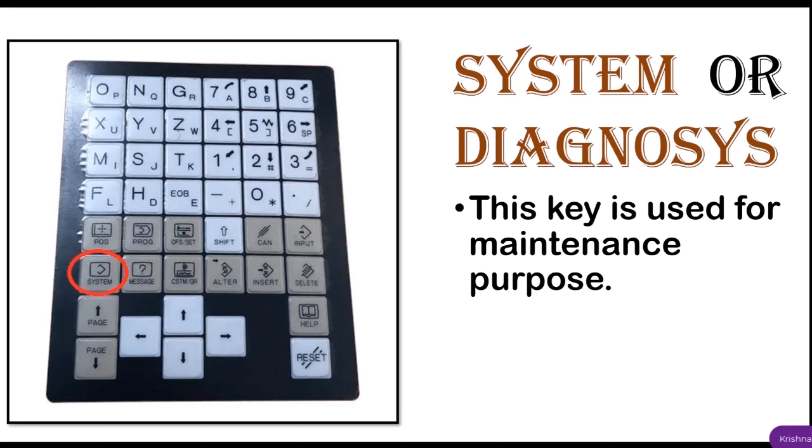Our next key is the custom graph key. Here, you can see the running program graphically. There's nothing particularly special about it. You can simply see how the tool is working graphically. If you want to view it, just press this key when your CNC is performing any operation.

Our next key is the message key. With the help of this key, we can see messages. If you make any mistake, the CNC will notify you with a message. To view that message, press the message key, see what mistake you made, solve it, and then press the reset key. So let's see this in action.

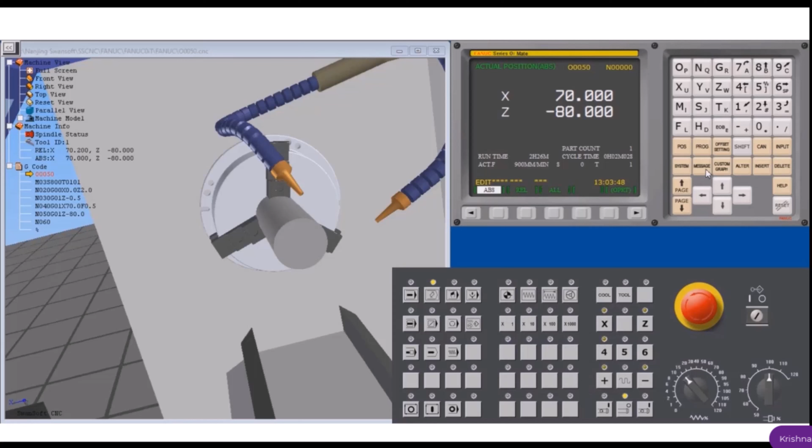Here I'm going to make a mistake. You can see in this simulator, I'm getting a message like this. But in your CNC machine, you will get this message here. Okay, just solve the problem and press the reset key.

Let's move further. Our next keys are mode selection keys. There are some modes in a CNC machine, and to select those modes, these keys are used. With the help of these modes, we can perform various operations. Let's go through them one by one.

Our first mode is auto mode. Whenever you want to start or run a program, your machine must be in auto mode. Without this, the program will not run and the CNC will give you a message. So you have to turn on auto mode to run your program.

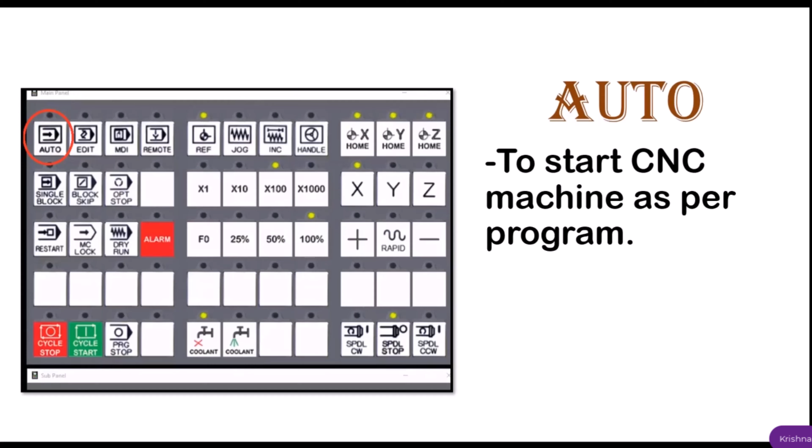Our next mode is edit mode. As you remember, when we created a new program, we switched to edit mode. To create a new program, you have to select edit mode. Whatever changes you make in this mode get saved in your CNC machine, meaning those changes are permanent. So if you do any editing in your program, it gets saved in your CNC machine.

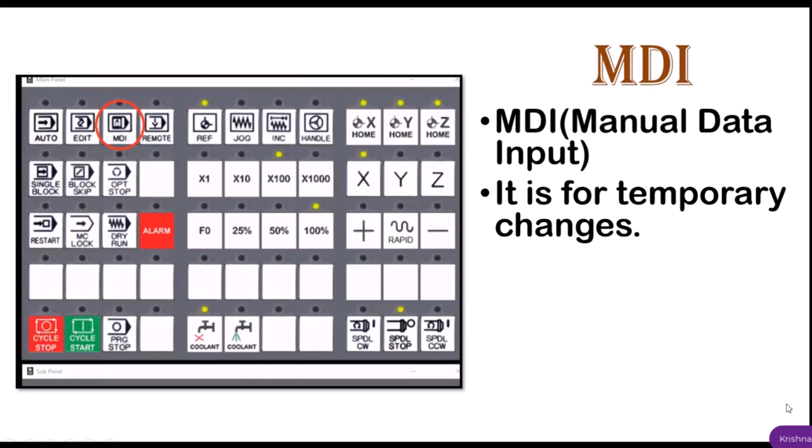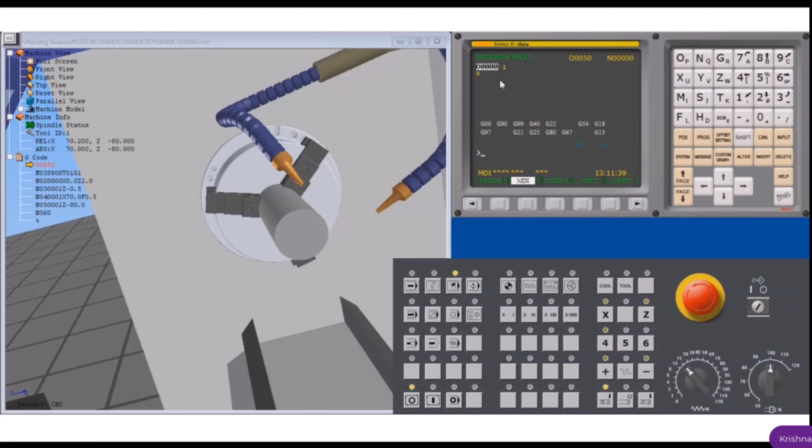Our next mode is MDI, manual data input. If you want to make temporary changes, you do those in MDI. Let's see this with the help of a video. This is MDI mode. Here I want to rotate the spindle, so let's rotate it using the M03 code. We will cover these codes later, but for now, just observe. As soon as I press cycle start, the spindle rotates and the code disappears. This proves that this mode is for temporary purposes.

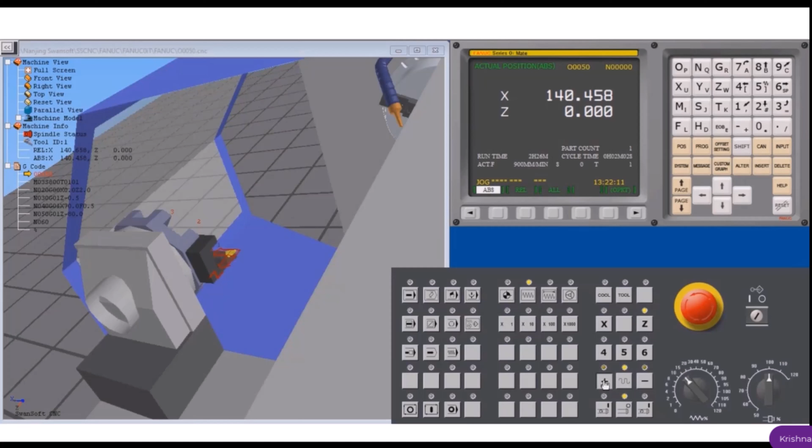Our next mode is reference. If you remember in our first topic, I mentioned homing when you start your CNC machine. Homing or reference moves the turret to its reference position. Let's see how to perform homing with the help of a video. This is our turret. First, I'll move this turret so that you can better understand homing. Okay. So press the reference key, then press X and Z, and see how our turret moves to its reference position.

Our next mode is jog mode. After pressing this mode or key, you can move or rotate the turret. You might ask why we need to rotate the turret. Well, many times our insert gets damaged or wears out. To change that insert, the tool must be in front of you so that you can easily change it. To bring the tool in front of you, select jog mode and then press the turret key so that your required tool is in front of you, and then change the insert.

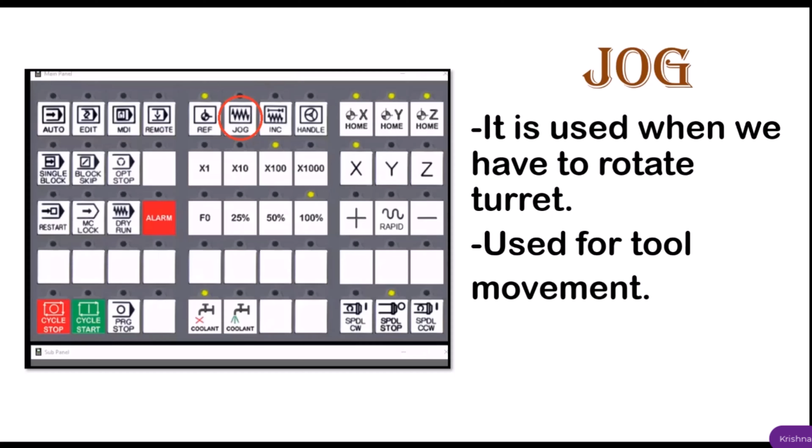This jog mode is also used for tool movement. Let's see this jog mode with the help of a video. First, select jog mode and then I'll move the tool. See, our tool is moving.

Our next mode is handle mode. Tool movement can also be done in handle mode, where we can control the speed of tool movement by pressing these keys. If you want to move the tool quickly, press multiply 1000. For slow movement, press multiply 10 or multiply 1, depending on the situation. In setting mode, we have to touch the tool to the job face, so we adjust the speed of tool movement accordingly. At that time, we use these keys. This is how our handle looks.

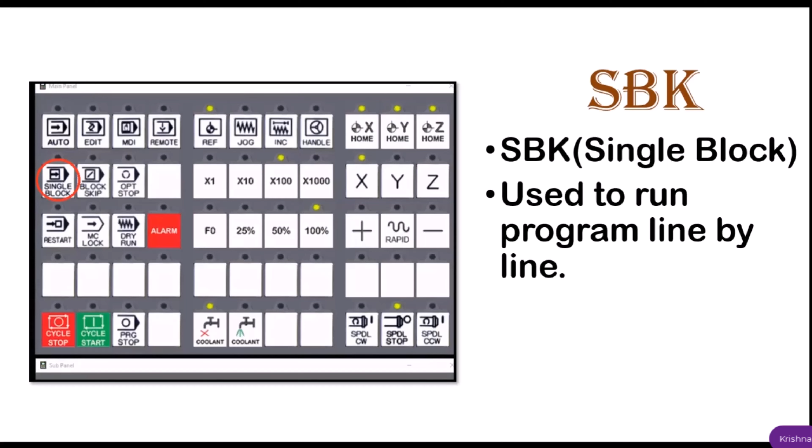Our next keys are program control keys. These keys are used to control the program. Our first key is SBK, single block key. If you want to run the program line by line or block by block, this key is used. The machine will read the first line, run it, then stop. After pressing cycle start again, the machine will read the second line or block, run it, and stop. Let's see this with the help of a video. Here I have selected single block mode.

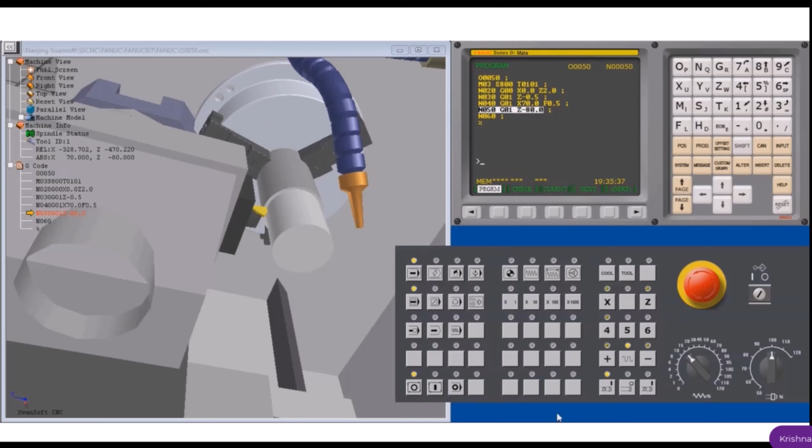See, the machine runs for a single block and then stops. After cycle start, it reads one line, runs it, and stops again. This is useful when you are developing a new job because in that situation, you need to know whether everything is okay or if there's a mistake in the program to avoid tool collision or accidents. Always select single block mode when you're doing any new job development.

Our next key is BLD, block delete key. If you want to skip any block or line in a program, you can use the BLD mode. If you don't want a particular line or block, just insert a slash before that line and select BLD mode. Let's see this in detail with the help of a video.

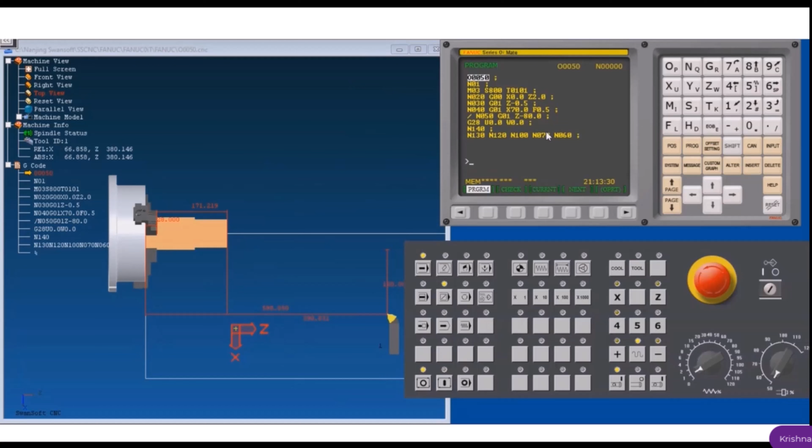See, this is our BLD mode key. You need to give a slash before that line to skip it. Let's see if the line gets skipped or not. See, the line was skipped. So, it's working. Our next key is optional stop key.

As we saw in single block mode, the machine stops after each line or block, and in optional stop mode, the machine stops after a particular operation. For example, there are various operations in a program like roughing, drilling, finishing, grooving, etc. If you want to stop the machine after a particular operation, use the M01 code after that operation and then select OPT mode. Do you see the difference?

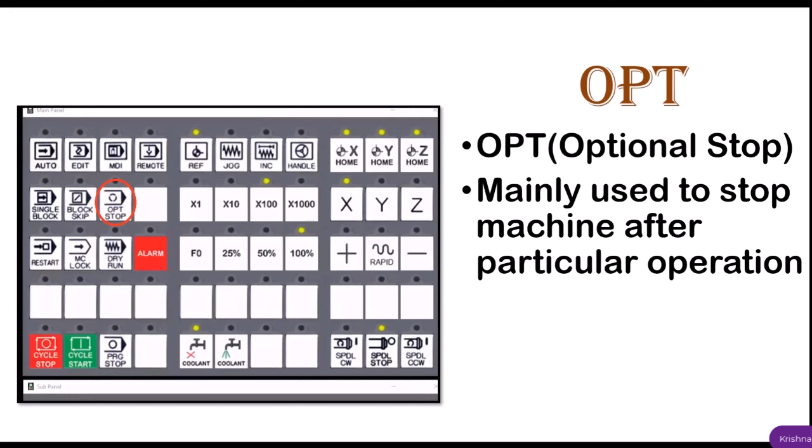In single block mode, the machine stops for each block, and in optional stop mode, the machine stops after a particular operation. Let's see this with the help of a video. As you can see, I have used the M01 code after the first operation and selected optional stop mode. See, our machine stopped. Now, if I remove OPT mode, let's see what happens.

The machine keeps running even after the M01 code, and the second tool begins its operation. So we have to select OPT mode along with the M01 code. Then only will the machine stop after the operation. Remember to press OPT mode along with the M01 code.

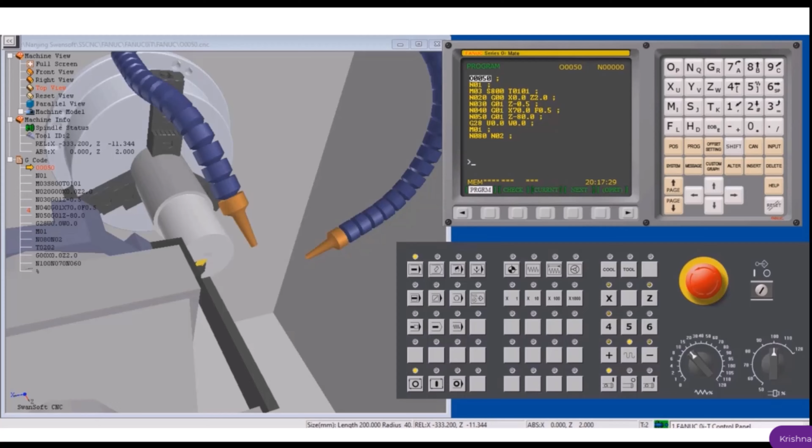Our next key is dry run. This is used to run the machine without any actual cutting. It allows you to see tool movement without considering cutting speed, and all movements are fast. This mode is not used very often. You can just observe tool movement without any actual cutting of material.

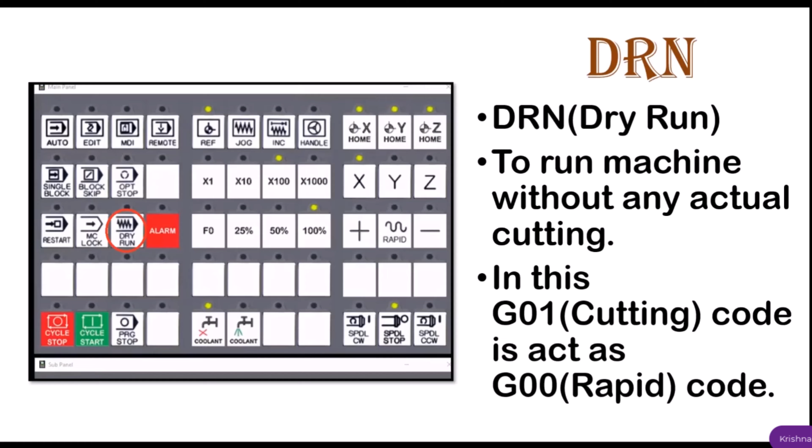Our next key is machine lock. This key is used to lock machine or tool movements. It is also not used frequently. Just have a look at this key in the video. Here I have selected machine lock mode. When I press cycle start, see, only the spindle is moving and all other movements are locked.

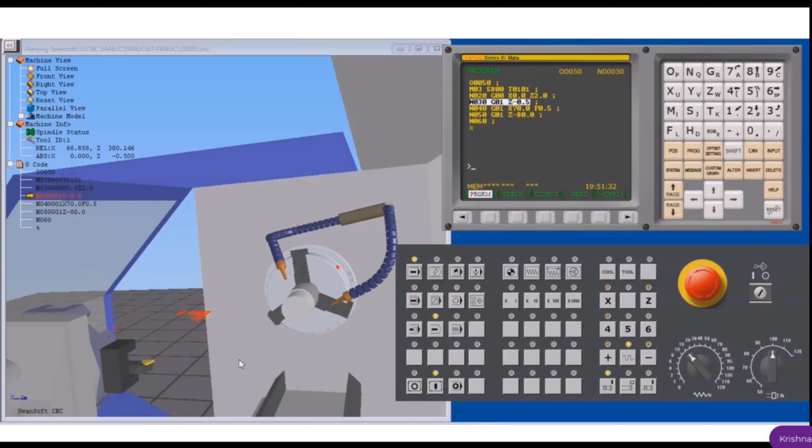Our next keys are editing keys. These keys are used for writing and editing programs. The first key is the insert key. To insert a written code into the CNC, we use this key. Let's see this key in action in the video.

Here I will write a line of code, and when I press the insert key, see, our code gets written in the CNC machine. This is the use of the insert key. Here I will write one more code and then press insert. Our next key is the delete key. If you mistakenly write any wrong code and want to delete it, this key is used.

Just have a look in the video. Here I'm going to delete the G01 code. To do that, select the code and press the delete key. That's it. Our next key is alter. If any written code is wrong and you want to alter it with another code, we use the alter key. Let's see this in the video.

Here, if I want to alter the G01 code with G00, see how I do it. First, select the code, then write the code to alter, and then press alter. This is how we alter. Our next key is the shift key. As you can see, there are two alphabets written on a single key. If you want to print the second alphabet of that key, use the shift key and then press that key.

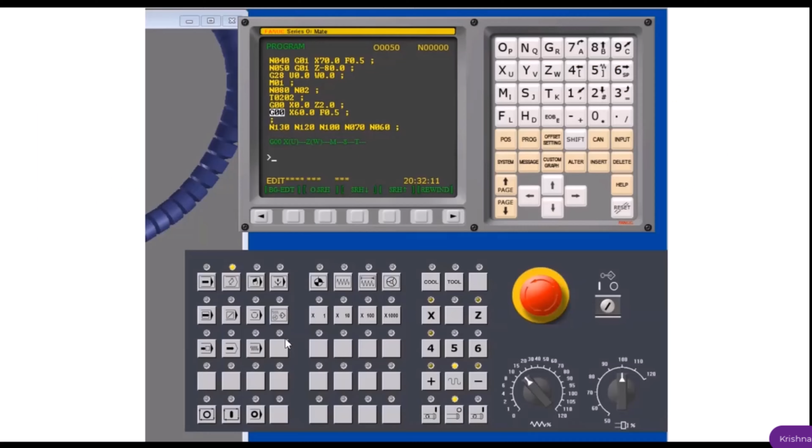Now let's see this with the help of a video. See how I select U and W with the help of the shift key. First, press the shift key and then press U. Do the same for W. In Fanuc, you only need to press the shift key once and then press any key you want. But in Siemens, you need to press and hold the shift key and then press the other key you want to print.

That's a little difference between these two control panels. Okay, in Fanuc, you only have to press the shift key once, and in Siemens, you have to press and hold the shift key.

Moving on, our next key is the cancel key. If we make any mistake while writing a program and want to delete that code, we use the cancel key. As you can see, the delete key is used when we want to delete any code that is already written or inserted, and the cancel key is used when we want to delete code while writing a program that is not yet inserted.

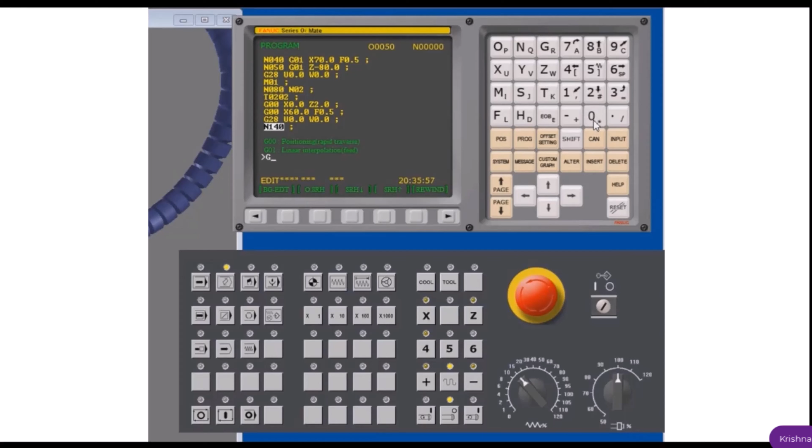Okay, let's see this with the help of a video. Here I will make a mistake while writing a program, and to delete that mistake, I will use the cancel key. Okay, so if you make a mistake while writing, use the cancel key, and if you want to delete a code that is already inserted, use the delete key.

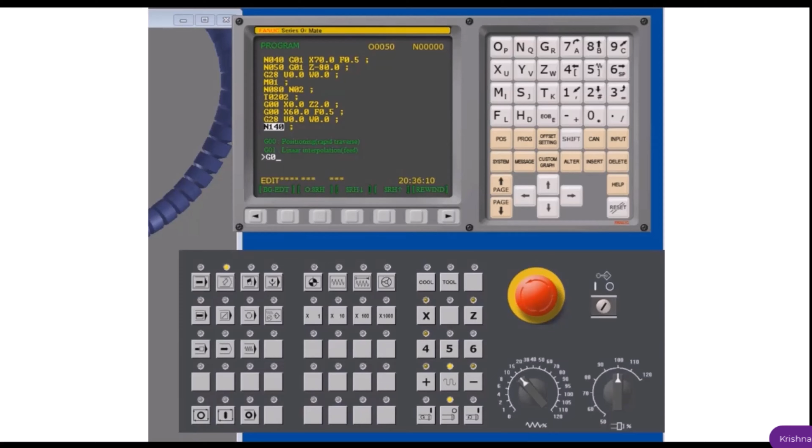Our next key is the input key. This key is used to give offsets. We will cover this key in the offset topic. Let's do a quick revision of what we have learned. These are the alphabets, and these are the numbers.

Here we have the EOB key, end of block key, which is used to end a block. When you press this key after any code, the machine will understand that the block has ended here. After that, we learned about the position key, which is used to see the position of the tool, the program key to see programs, and the offset key to give offsets. We have three types of offsets: wear, geometry, and work offset.

Then we saw the shift key, which is used to select the second alphabet on a key, the cancel key, which is used to cancel any code while writing a program, the input key, which is used to give offsets. We will learn more about it later.

The system key, which is used for maintenance purposes, the message key to view messages, the custom graph key to see a graphical representation of the running program, the alter key to alter any code with a new code, the insert key to insert code into the CNC, and the delete key to delete an inserted code.